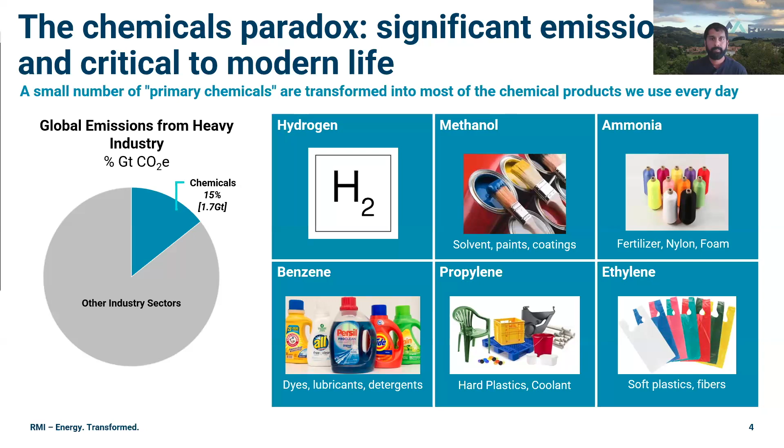The general consensus right now is that chemicals demand will grow considerably even in net zero scenarios. And in fact, in the business as usual scenario, demand for chemicals will at least double, pending ammonia and methanol demand for shipping and as an energy carrier. So what that means is that using chemicals more wisely and making them with a lower emissions footprint will both be necessary to achieve climate goals. Next slide.

So reducing emissions from the chemical sector requires tackling a dual challenge. To explain what I mean, I'll use a cooking analogy. So chemistry is like cooking. We source ingredients, process them, and transform them into useful products. But the problem is that the chemical industry relies on fossil fuels, not just for energy, our stoves, but also as raw materials, our ingredients.

So to decarbonize, we need new cookware, such as electrified stoves, better ingredients like low carbon feedstocks, and fresh recipes like innovative processes. So right now we're frankly cooking with a lot of junk food, producing unnecessary waste. So efficiency and smarter choices about what we make in the first place are just as crucial as rethinking how we make it. Next slide.

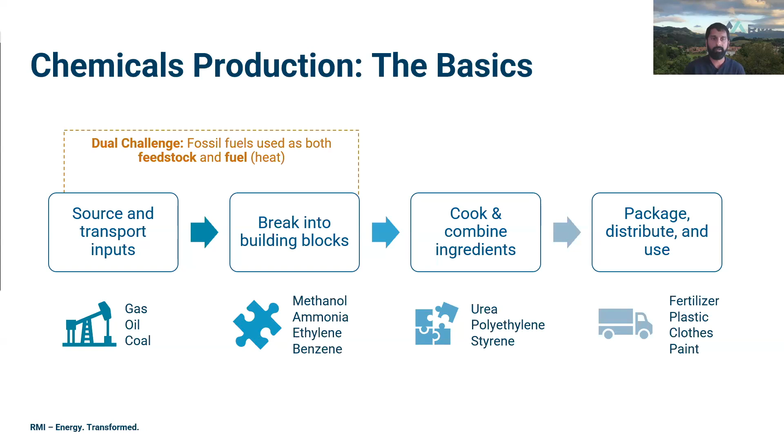So emissions are generated at all stages of chemical production, from raw material extraction, processing, and transport, from the chemistry itself, the reactions, and from generating the heat and electricity used in chemical plants. In addition, there are emissions from the use phase of the products of the chemical industry, such as emissions from application of fertilizer and emissions from the incineration of plastics or other waste chemicals. So our solutions for low emissions chemical industry must cover all stages as well.

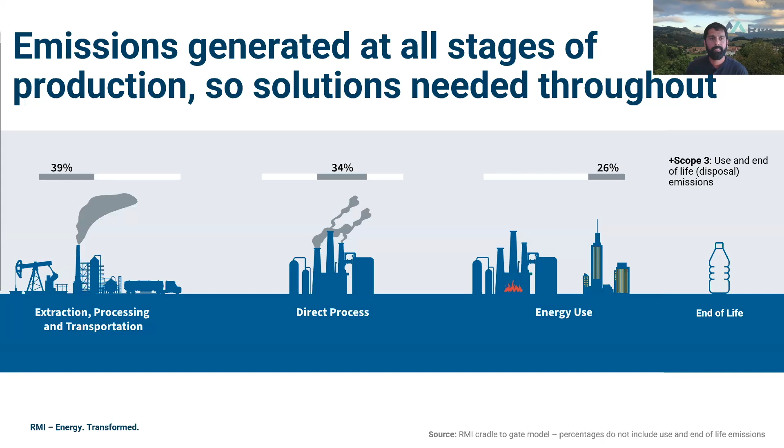Next slide. The challenge is that the chemical industry is unique in its complexity, thousands of products, a multitude of production methods, and an array of potential interventions. So how we slice through the complexity to quantify solutions that will drive maximum impact across the chemical sector is important. And now I'll pass it to my colleague, Catherine, who's a senior associate on the chemicals team at RMI, to tell you how we tackled the complexity and what we found.

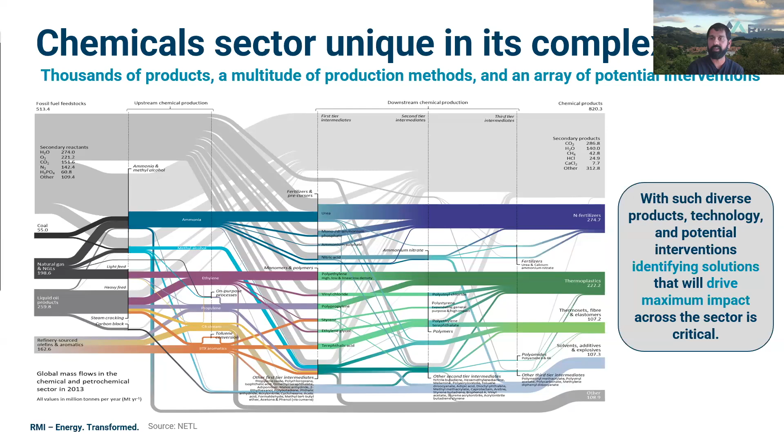Awesome. Thank you, Ankur. Next slide, please. So for our report and our analysis, we focused on 6 primary chemicals, the 6 that you see highlighted here on the left-hand side of the slide. These chemicals make up 65% of the U.S. chemical sector emissions on a well-to-gate basis. We did not include end of life in this analysis, so very focused on the upstream through primary chemical production gate emissions.

Since this report focused on the U.S. chemical sector specifically, our model basically was developed for the key production routes for these 6 chemicals that you see here on the right-hand side of the slide. So we looked at steam methane reforming, syngas production, Haber-Bosch, steam cracking, and then refining for the olefins and aromatics as well. Next slide, please.

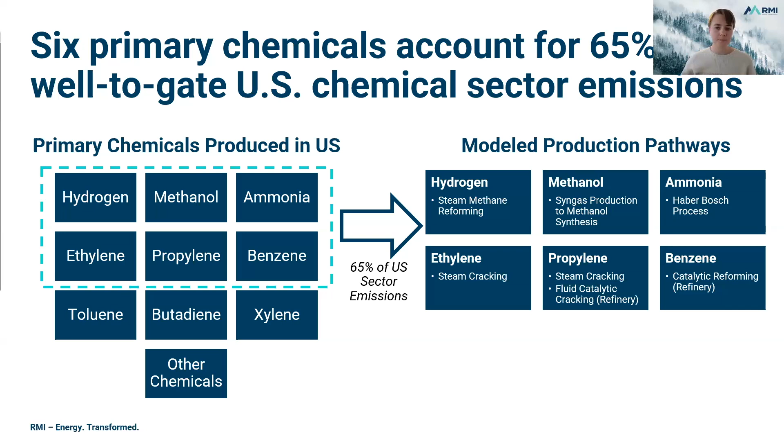So how did we develop this model? Using existing peer-reviewed models such as the DOE GREET model, as well as the PRELIM model, as well as we had over 25 external interviews with industry experts, NGOs, academics, and other think tanks, as well as within RMI, we have over 200 energy and industry specialists. All of those things combined to be able to have us make a chemical-specific model. What this allows us to do is model both traditional chemical production routes for the sector and emissions reduction opportunities.

So as we've mentioned, it models the 6 primary chemicals that Ankur introduced in his section, and then it models over 24 emissions reduction levers. What's unique about this model is that we're able to configure it for individual processes. Its default assumption is using mass and energy balances coming from these kind of peer-reviewed open source models. But if there was a desire to modify and use it for an individual site, that is also possible within the tool.

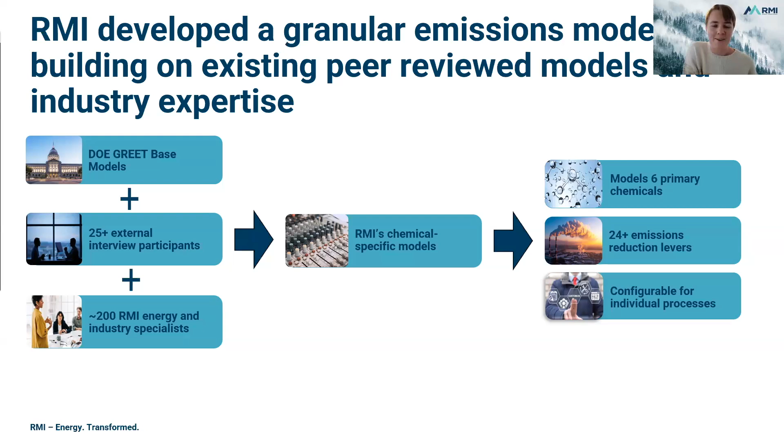As well as being able to be used for an individual site's emissions and understanding of the profile, we can also kind of zoom out and look at the sector as a whole. So the model will provide you a carbon intensity, and then based on production volumes, whether it's for a country or even as we get more global looking, we can estimate basically the sector emissions as a whole. The focus of this report was the US, so all the results that we'll discuss next are US-based results. So next slide, please.

So looking at the chemical sector as a whole, you can see this graph on the right shows these 24 plus emissions reduction levers that I mentioned already. Looking at these, you can see there's really no silver bullet for the chemical sector. There's no one solution that can eliminate all the sector's emissions by itself. So our question going into this analysis was, okay, how do we choose which levers we should pursue? And so what this modeling effort really allowed us to do is compare the different options on an emissions reduction basis, which is what you see here.

The values represent the maximum emissions reduction potential if every facility for which the lever was applicable implemented that lever to the fullest extent. And so basically what this shows you is the best case scenario of reductions possible if everything went perfectly. I will acknowledge that this slide is fairly small and there's a lot of data on it. So if you are interested in digging into these numbers, the report that's been linked in the chat, it's Exhibit 16 that shows these same results, in case you're curious.

So as we can see on the bar chart on the right, hydrogen from electrolysis is that first bar that has the highest reduction potential for the sector as a whole, as well as process heat decarbonization, high purity carbon capture, and methane leak mitigation close behind. For simplicity for both this and throughout the report, we did lump these levers into different categories, which are the 4 colors that you see here.

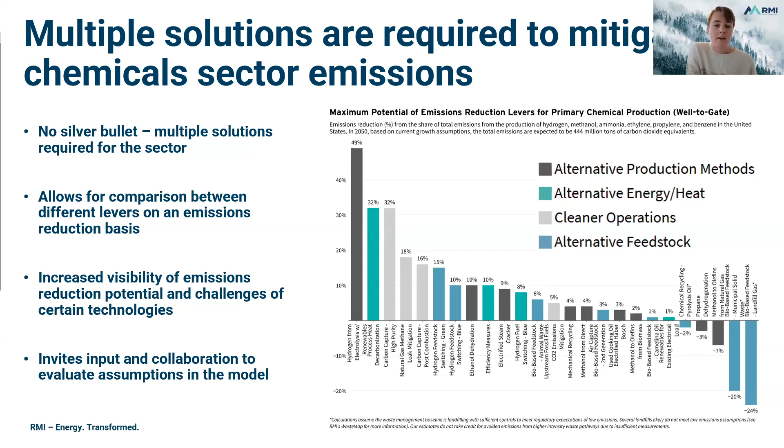So of these categories, if we lump them together rather than looking at the 24 emissions reduction levers, the ones that we have determined have the highest potential are alternative production methods, so making something a different way than we do today, as well as cleaner operations, so cleaning up the way we make processes today. Next slide, please. So as I mentioned, this can be used for both the chemical sector as a whole, which is what we saw on the previous slide, but also can be looked at from an individual facility basis. So since we modeled steam cracking, I'm going to just show you this example. In the report, we also look at refining and we look at hydrogen-based molecules as well.

So based on this modeling that we did, we determined that for steam crackers, decarbonizing process heat is the most impactful lever. This has options like clean hydrogen to replace the fuel that is currently used, which is typically natural gas, electrification of the steam cracker itself, which is being pursued in industry, as well as blue hydrogen firing. So blue hydrogen firing, slightly less emissions reduction potential as compared to a fully clean hydrogen, but still provides pretty significant emissions reduction.

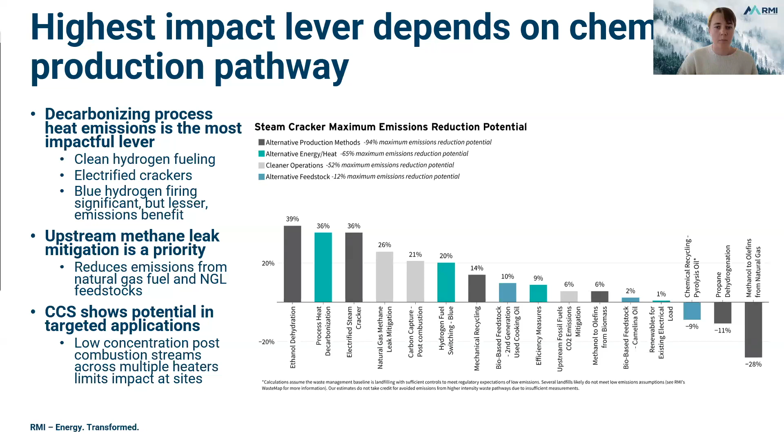So this is just an example that I wanted to show out there of how this model can be used. It can be modified for the production of each of the 6 chemicals that we discussed and their various emissions reduction levers that apply to those chemicals. Next slide, please.

So everything we looked at so far was, as I mentioned earlier, kind of idealistic: if everything went to plan and all these sites implemented the solutions they could, how much reduction could we get? But we understand that this isn't always possible everywhere, and not all of these levers can be deployed today. And so what we have done is what we've called a deployability analysis.

So we determined the top 10 levers, which you can see on the screen here, that are deployable today based on their technology readiness level and current commercial scale. And we were able to perform, based on this map that you see on the right, a site-by-site analysis based on geographies and the policy landscape in the specific locations for all of the production sites in the US. We looked at things such as proximity to CO2 storage and pipelines, availability of recycled feedstocks, and other indicators that could really influence the adoption rate of these various deployable today solutions.

In addition to just looking at what exists today, part of the analysis focused on 4 policy and infrastructure improvements that we could implement that would potentially increase the uptake of these deployable today levers. These would be things such as if the 45Q credit were increased by $10 a ton, if we had further regulation on methane leak mitigation, if we had more recycling, so more extended producer responsibility and bottle bill regulations, as well as additional incentives that we could deploy to bring down the cost of blue hydrogen.

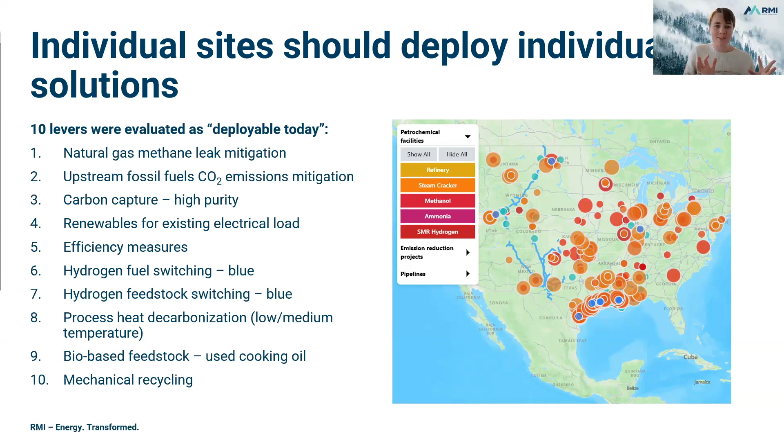So once we did this deployability analysis, what were the results? I will show you on the next slide, please. So the graph on the left here shows that for the first layer, just deployable today based on geography and policy landscape, we determined that 34% of chemical sector emissions can be mitigated by these 10 deployable today solutions. The additional 4 policy and infrastructure improvements could lead to an additional 14% reduction, which is great, but does leave 52% of emissions remaining to be mitigated.

And so we believe that we need to do 2 things in parallel for the chemical sector. One is accelerate these current solutions, as I discussed on the previous slides, and 2 is double down on innovation. So what can we innovate on to address those remaining 52% of emissions? Next slide, please.

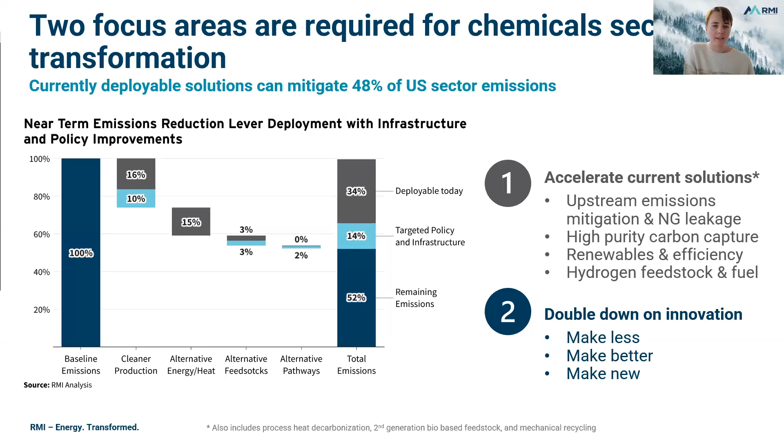So on the innovation side of things, there are 3 key focus areas. Step 1 is make less. So recycling, circularity improvements, reuse, as well as design solutions to maybe use less chemicals in the products that we use today. We really see this as the first step, since it reduces the amount of feedstock and product required to achieve the same functionality that we have today. So we'll potentially make less chemicals for the same functionality.

2, make better. So how can we make the same products using less energy than we do today? Things like efficiency projects within production facilities, as well as direct electrification, both result in less energy use compared to the traditional methods that we use today. Innovators in this space, I would say, are looking to make the same products as we use today, but through more efficient and less energy intensive processes.

And then finally, make new. So how do we make the same products using different feedstocks or production methods and even different business models, as we look at modularity solutions and more dispersed operations? So innovators here are really looking at how we can disrupt and make either the same product a completely different way, or make different products that can achieve the same functionality for society.

So we can launch the second poll today, which is, we're just curious to see, where do you see yourself and your organization fitting into this space? So just trying to get a pulse of who's here today and what we're thinking about in this innovation space. I'm going to give it about 20 seconds to take a look at these results, and then we'll get a sense.

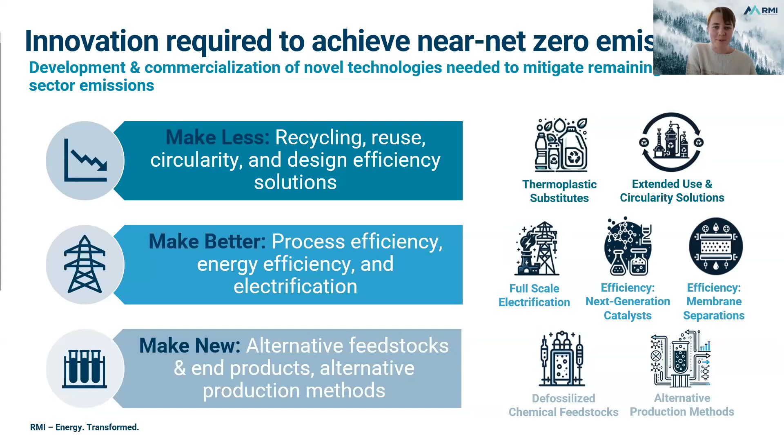Thanks so much, Catherine. Yes, so what needs to happen next? We believe that we need to continue to build the field with data through emissions visibility and shared goals across the diverse stakeholders in this ecosystem while advancing the two parallel paths that Catherine alluded to. As our team likes to say, you can't manage what you don't measure. And we must improve our understanding of emissions from the sector and emission reduction levers across the globe, including key regions like China and India beyond our US analysis.

We also recognize that the sector is complex and nuanced, as Ankur showed on that Sankey diagram earlier, and there are many folks that have been working on portions of the problem for years, including the issue of plastic waste and circularity and others. And we would benefit greatly from increased coordination across these efforts.

Additionally, we first need to accelerate current solutions to cleaner production through deployment of existing technology, the 10 that Catherine mentioned, accelerated efforts for coordinated infrastructure deployment, national and subnational policy interventions, and harmonization of standards and accounting procedures to enable transactions of lower emissions products.

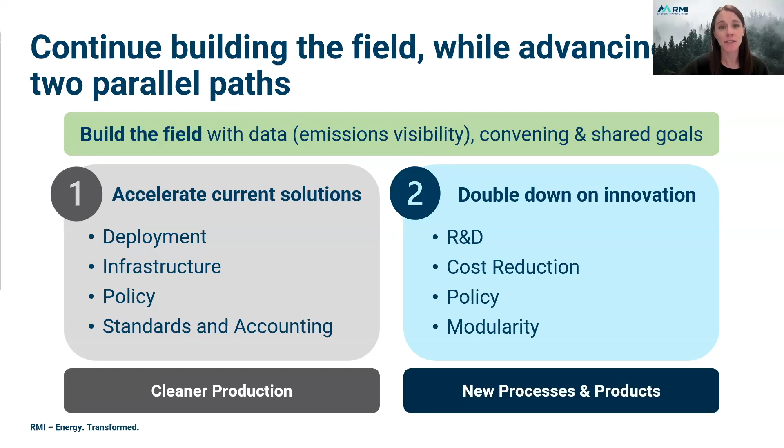As I mentioned, we recognize that this will require coordinated effort across a number of stakeholder groups, a few of which you see on the slide here. I'm going to build on Catherine's earlier discussion of a steam cracker, where one of the many opportunities we have is to reduce emissions through process heat decarbonization to make low emissions plastics, like a plastic bottle.

When you think about what it takes to do that, NGOs are needed to raise ambition for near-term action. Policymakers can develop incentive structures or support infrastructure that enables the business case, and retailers can drive demand signals for low emissions product.

At the center are the chemical producers of today and tomorrow that pilot these new technologies and bring them to scale. All of this is underpinned by the need to engage local communities and consumers to ensure meaningful involvement in project development and a clear understanding of the health and environmental impacts of the end product. Next slide, please.

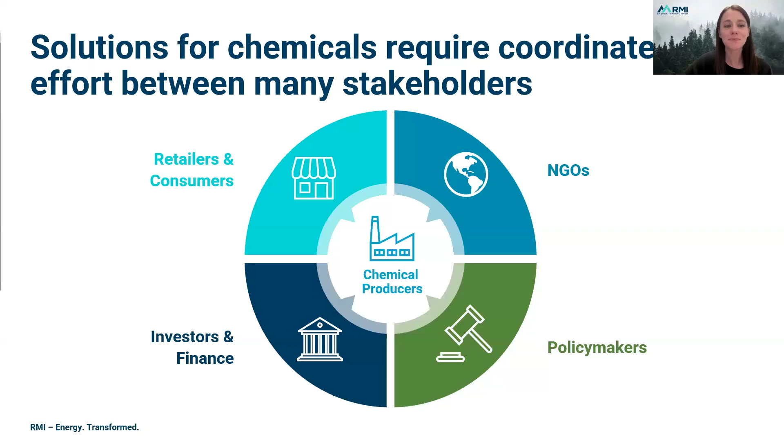So we're really glad to have had the chance to scratch the surface of our analysis and report with you all today. We hope it's piqued your interest and left you with new ideas or questions that you'd like to pursue further. But this is actually just one portion of the work our team does here at RMI, and you can see a few other ways to engage with us on the slide here.

These include net zero strategy, so evaluating emissions reduction pathways at a sector level, like we've discussed today, but also to plant and project level assessments. These are really built on our foundational emissions visibility work and modeling, and we hope to extend that in the near term to China, India, and other geographies.

RMI also has a foundation in market-based mechanisms, including demand aggregation platforms to spark offtake for emissions differentiated commodity products. And we're working to build out this effort for select chemicals.

And innovation, we have collaborated closely with Third Derivative, which is RMI's climate tech accelerator, to launch a chemicals-focused startup cohort, supporting early-stage innovators in bringing solutions to market, and also launched Mark 1, which is our DevCo as a service collaboration with Deep Science Ventures to support first of a kind project development.

And lastly, we'll be releasing an applied innovation roadmap later this year to provide an independent perspective on how to accelerate deployment of electrification technologies for the sector. We believe and feel that momentum is building in chemicals, and now is the time to scale impact if we want to see meaningful progress on 2030 goals.